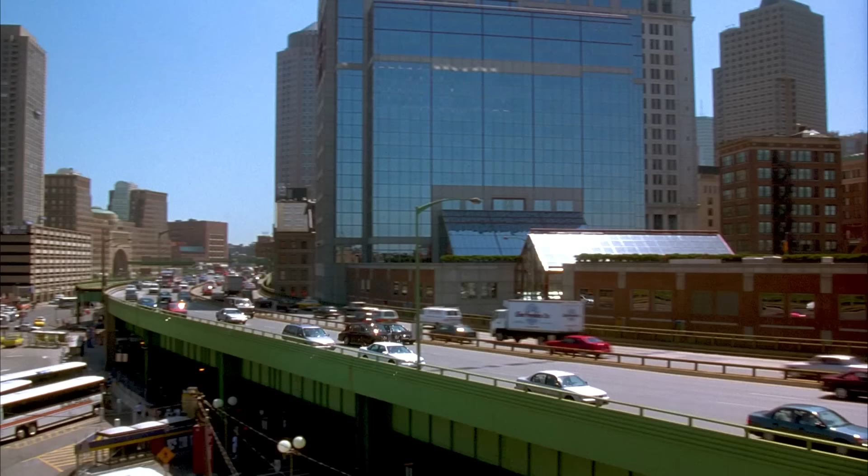Boston, Massachusetts is one of the oldest cities in America, founded in 1630, more than a few years before the advent of modern motor vehicles. In the 1980s, traffic in downtown Boston was nearly unbearable from the tangled streets laid out centuries ago. So, city planners and state transportation officials came up with what they considered a grand plan.

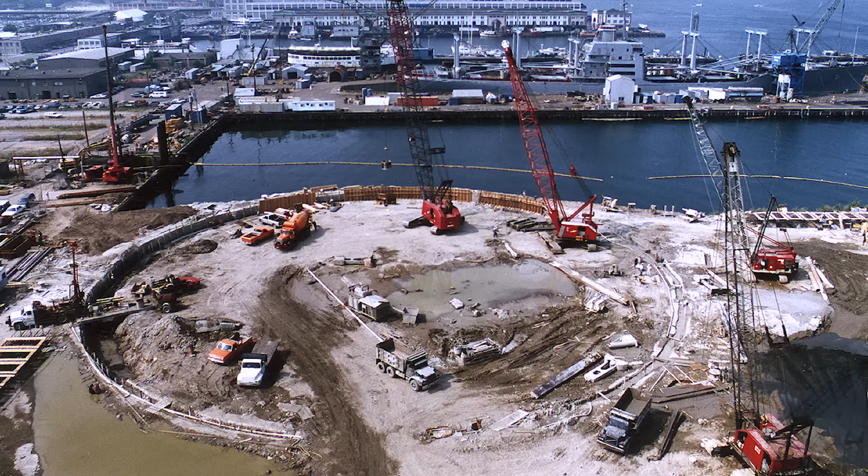They would reroute the elevated highway and so-called central artery of Interstate 93 into a tunnel below downtown, and extend Interstate 90 across the Inner Harbor to the airport in another tunnel. Construction started in 1991, and the project was given the nickname Big Dig because of the sheer volume of excavation required for the two tunnels. In terms of cost and complexity, the Big Dig was on the scale of the Panama Canal or Hoover Dam.

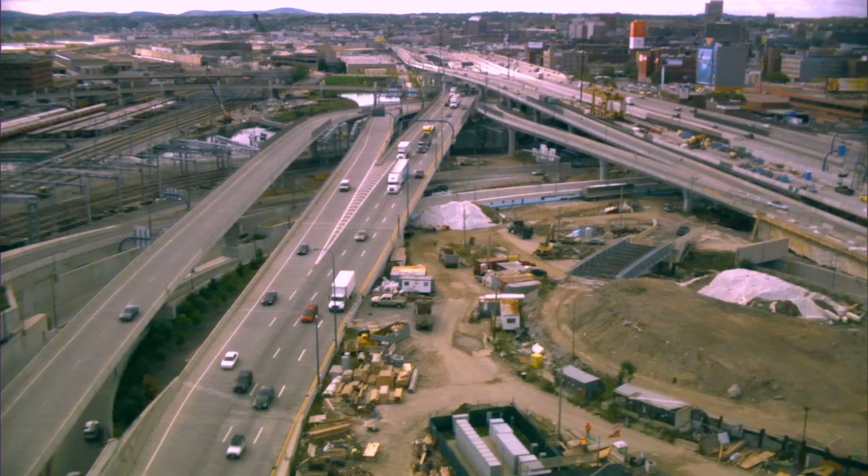It featured some of the most innovative construction methods of the time, and after 16 years of work, the project was finished on time and under budget. Actually, no. You might know the story already. Of course, the Big Dig did make a big dent in the traffic problem in Boston, but that came at a staggering price. The project was plagued with problems, design flaws, fraud, delays, and of course, cost overruns.

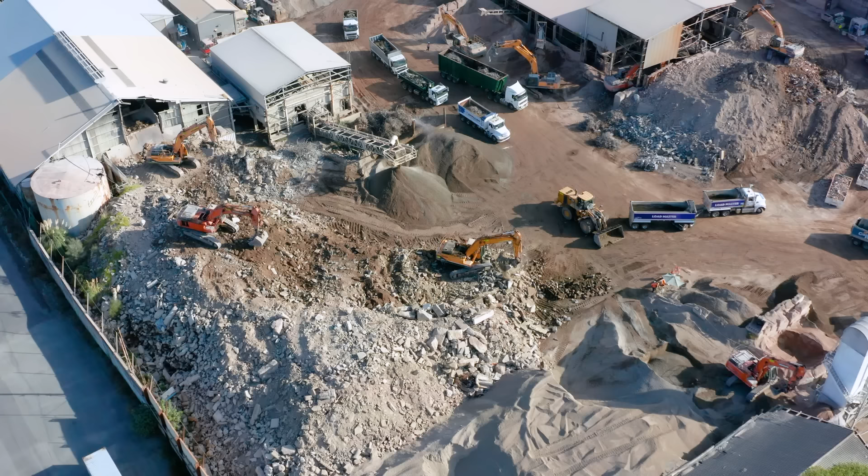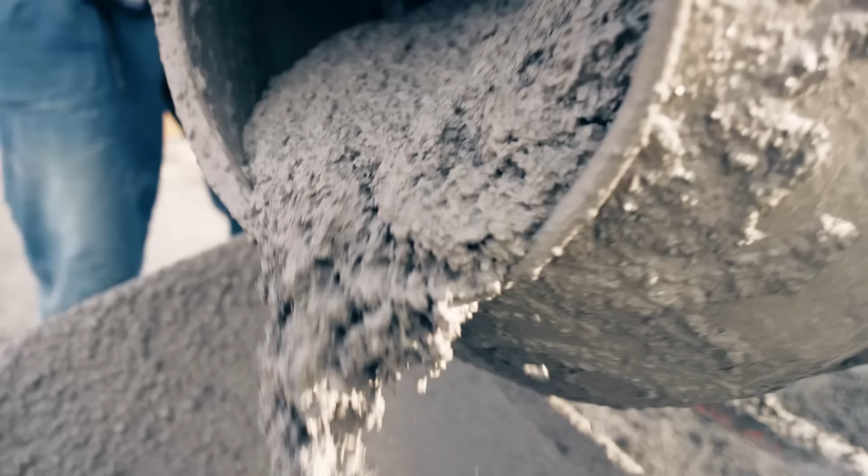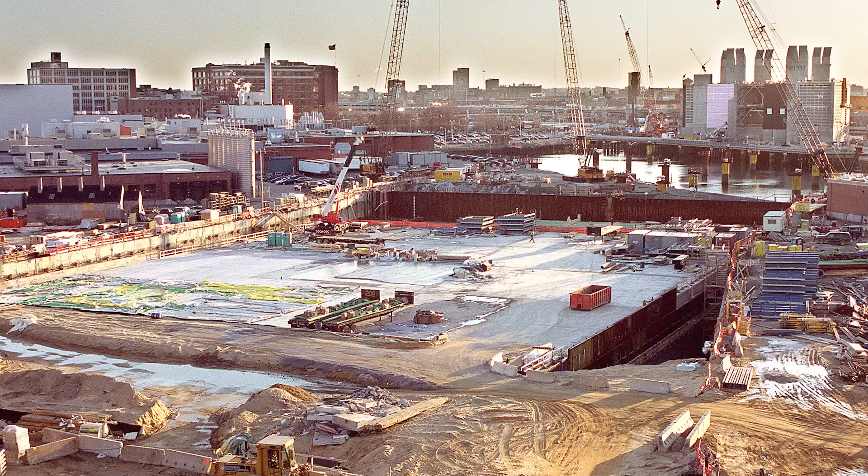Not many jobs go quite as awry as the Big Dig, but it's not just mega projects that suffer from our inability to accurately anticipate the expense and complexity of construction. From tiny home renovations to the largest infrastructure projects in the world, it seems like we almost always underestimate the costs. And the consequences of missing the mark can be enormous. Well, I've been one of those engineers trying to come up with cost estimates for major infrastructure projects, and I've been one of those engineers who underestimated. So I have a few ideas about why we so consistently get this wrong.

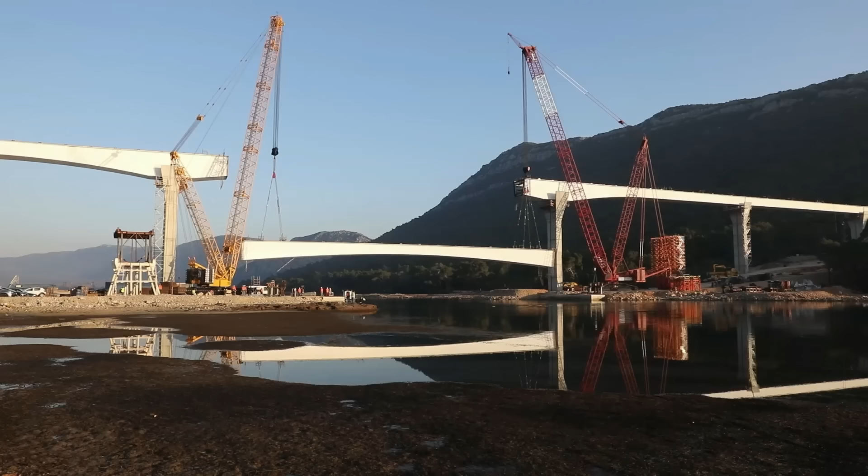In today's episode, we're trying to answer the question of why construction projects always seem to go over budget. Major projects are often paid for with public funds, so it's vital that the benefits we derive from them are worth the cost. And the only way we can judge if any project is worth starting is to have an accurate estimate of the costs first.

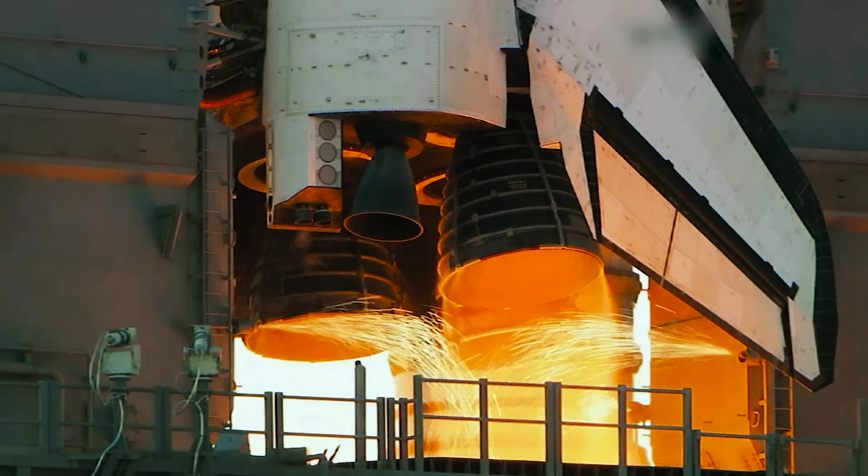And of course, this is not just a problem with civil infrastructure, but with all types of large projects paid for with public funds, like space programs and defense projects. They have to be justified. Most projects have benefits, and you do get those benefits at the end, no matter the cost. But if they aren't worth the cost, you'd rather not go through with the project at all. This is especially true for projects like streets and highways where not only the costs get underestimated, but the benefits are often overestimated too.

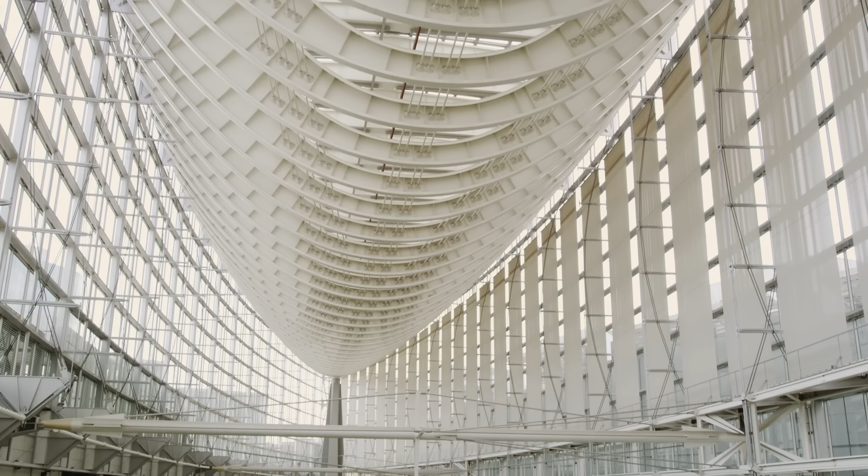One of the biggest issues we face with large projects is a chicken and egg problem. You don't know how much they'll cost until you go through the design, but you don't want to go through a lengthy and expensive design phase and end up with a project you can't afford. Budgeting and securing funds are usually slow processes, plus you need to know if the job's even worth doing in the first place. So you can't just wait until the bids come in to find out how much a project is going to cost. You need to know sooner than that, which usually means you need your design professional to estimate the costs. For an infrastructure project, that's the engineer, and engineers are notoriously not good at estimating costs.

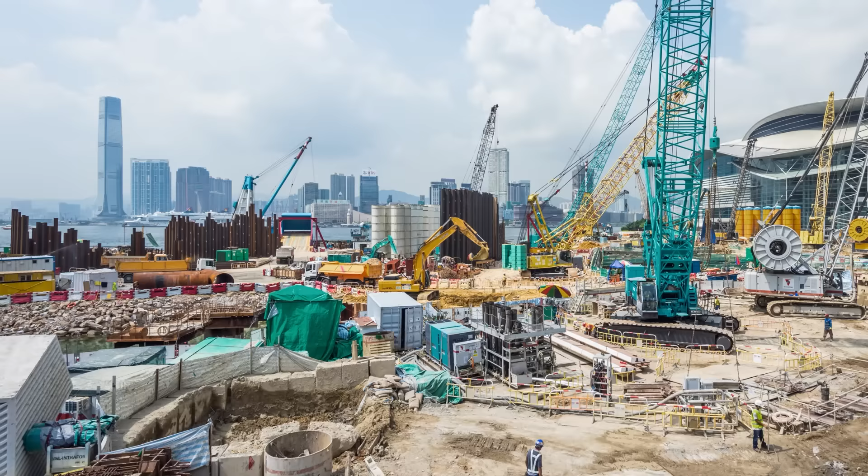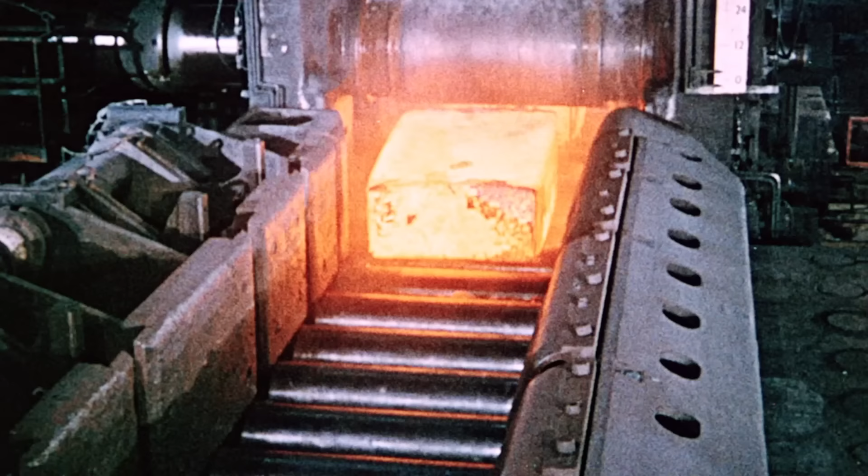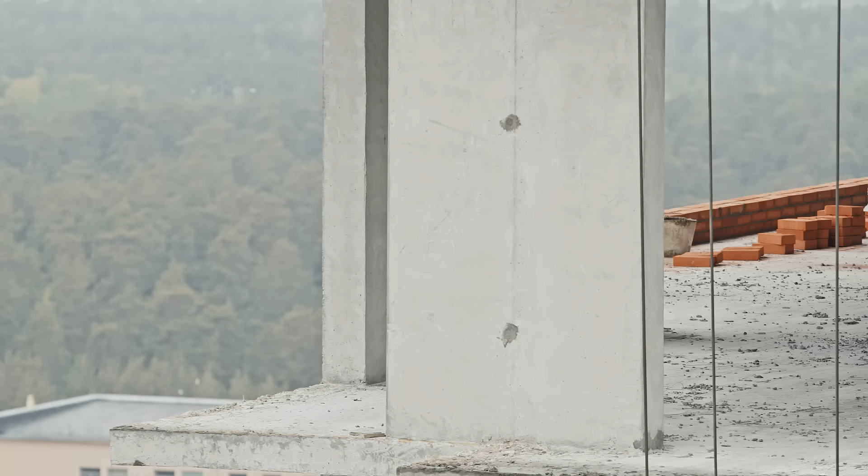We don't know which contractors are busy and which ones aren't, what machinery they have, or whether or not they'll bid on your project. We don't know the sales reps at the concrete and asphalt plants, or keep track of the prices of steel, aggregates, pumps, and piping. We don't have a professional network full of subcontractors, material suppliers, and equipment rental companies. We didn't study construction cost estimating in college, and most of us have never built anything in the field. And the people who have, those who are most qualified to do this job, the contractors that will actually bid on the project, usually aren't allowed to participate in the cost estimating during design because it would spoil the fair and transparent procurement process.

It would give one or more contractors a leg up on the competition. Because, here's a little secret, they aren't always so good at estimating costs either. When those bids come in, there's often a huge spread between them, meaning one of the most significant uncertainties of an entire project is sometimes simply which contractors will decide to bid the job.

Of course, there are some alternatives to the normal bidding process that many infrastructure projects use, but even those often require early cost estimates from people who are necessarily limited in their ability to develop cost estimates. In fact, the industry term for the cost estimate that comes from an engineer is the opinion of probable construction cost, or OPCC. Take a look at that mouthful. Two qualifiers, opinion of probable construction cost.

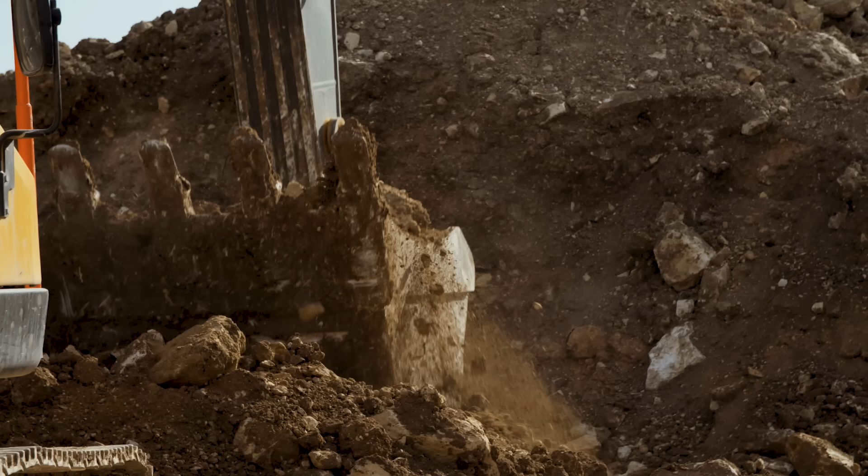And still, agencies and municipalities and DOTs will write that number down on a folded piece of paper, slide it surreptitiously to their governing board and whisper, "This is how much we need." And the next day, the journalists who were at the meeting will publish that number in the news. And now every future prediction of the project's cost will be compared to that OPCC, no matter how early in the process it was developed.

All this to say, estimating the cost of a construction project is hard work, especially early on in the project's life cycle. It takes highly skilled and knowledgeable people to do it well, and even then, it's a process absolutely chock full of uncertainties and risks that are really hard to distill down to a single dollar value. But construction cost estimates are just imprecise. If that were true, you would expect us to overestimate as frequently as we come under. We know that's not the case. Why is it always an underestimate?

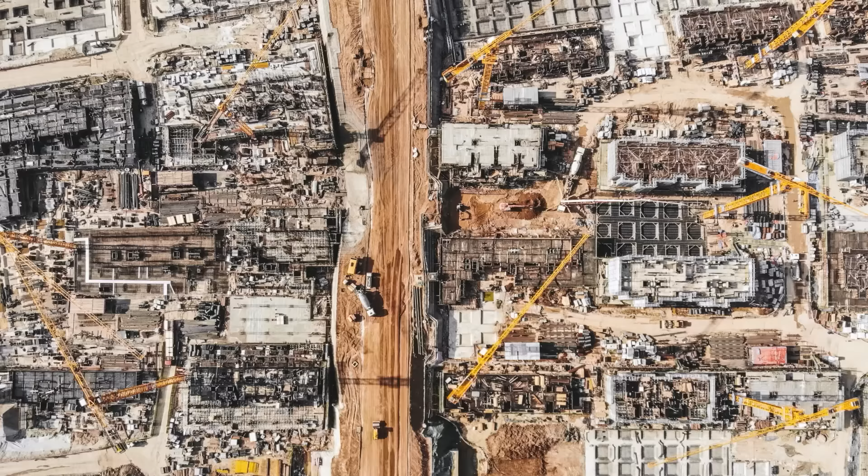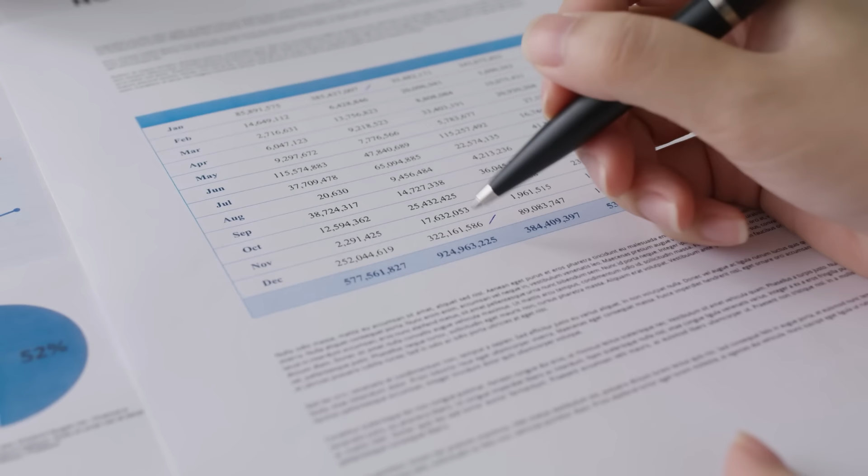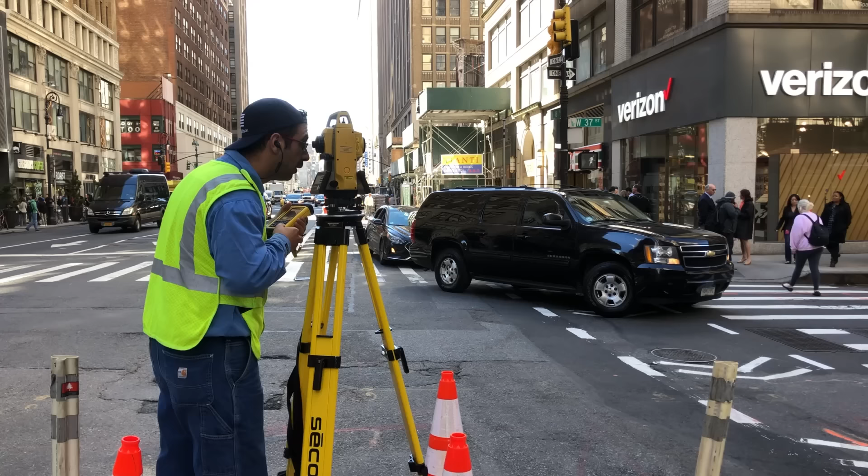One hint is the fact that you often just hear a single number for the project's cost. What's included in that $15 billion for the Big Dig or the cost estimate you see for a major project in the news? The truth is that it's different for every job, to the point where it's almost a meaningless number without further context. Large infrastructure projects are essentially huge collaborations between public and private organizations that span years and sometimes decades between planning, design, permitting, and construction. Land acquisition, surveying, environmental permitting, legal services, engineering and design, and the administration to oversee that whole process all cost money, sometimes a lot of money. And that's before construction even starts.

So if you think that a bid from a contractor is the project's cost, you're missing out on a lot. And if those pre-construction costs get included in one estimate, for example, the final tally of a project's cost, when they weren't included in an earlier estimate, like the engineer's OPCC, of course it's going to look like the project came in over budget. You're not comparing apples to apples.

Another reason for underestimation is inflation. The main method we use to estimate how much something will cost is to look back at similar examples. We consult the ghost of construction past to try and predict the future. It's not unusual to look at the cost of projects 5 or 10 years old to try and guess the cost of a project 5 or 10 years into the future. The problem with that is dollars or euros or yen or pound sterling don't buy the same amount of stuff in the future that they did in the past. The cost of anything is a moving target, and it's usually moving up.

That's okay, you might think, just adjust the costs. There are even inflation calculators online, but they normally use the Consumer Price Index. That's a figure that tracks the cost of a basket of goods and services that a typical individual might buy. Prices vary widely across locations and types of goods, so the idea is that if you monitor the dollar price of groceries, electricity, clothing, gasoline, etc., it can give you a broad measure of how the value of money changes over time for a normal consumer. But there's not that much concrete and earthwork in that basket of goods, which means the Consumer Price Index is generally not a good measure of how construction costs change over time.

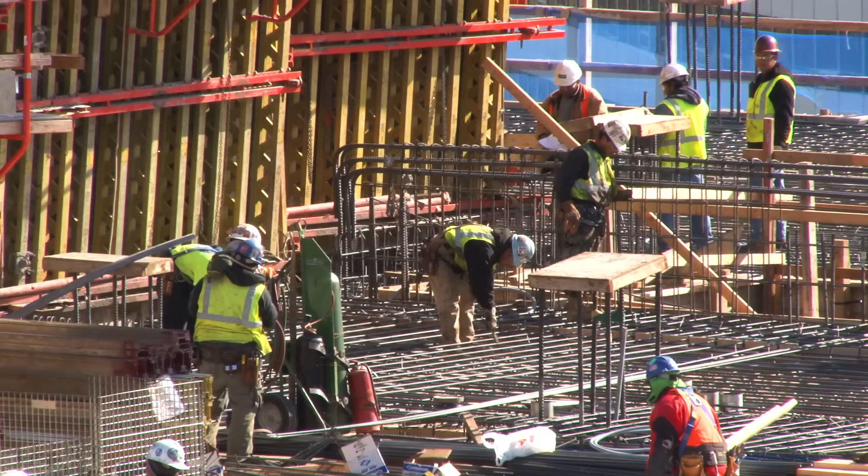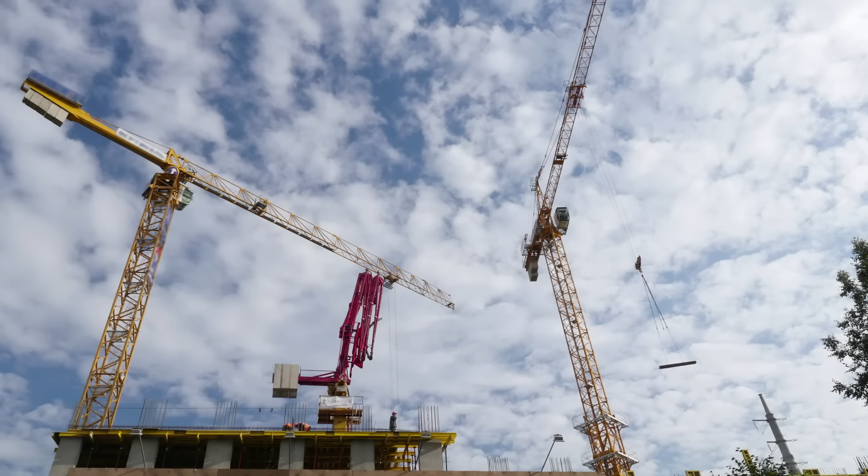There are a few price indices that track baskets full of labor hours, structural steel, lumber, and cement, and even separate those baskets by major city. You have to pay to get access to the data, and they can help an engineer adjust past construction costs to the present day. But they can't help them predict how prices will change in the future. And that's important because large infrastructure projects take a long time to design, permit, and fund. So if there are 2 or 5 or 10 years between when an estimate was prepared and when it's being used or even discussed, there's a good chance that it's an underestimate, simply because the value of money itself slid out from underneath it.

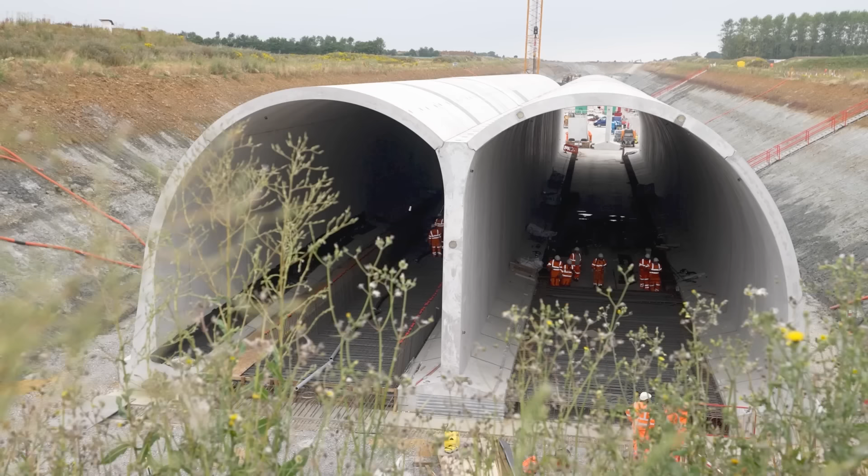Cost estimates have an expiration date, a concept that gets overlooked, sometimes even by owners, and often by the media who report these numbers. That slow timescale for construction projects creates another way that costs go up.

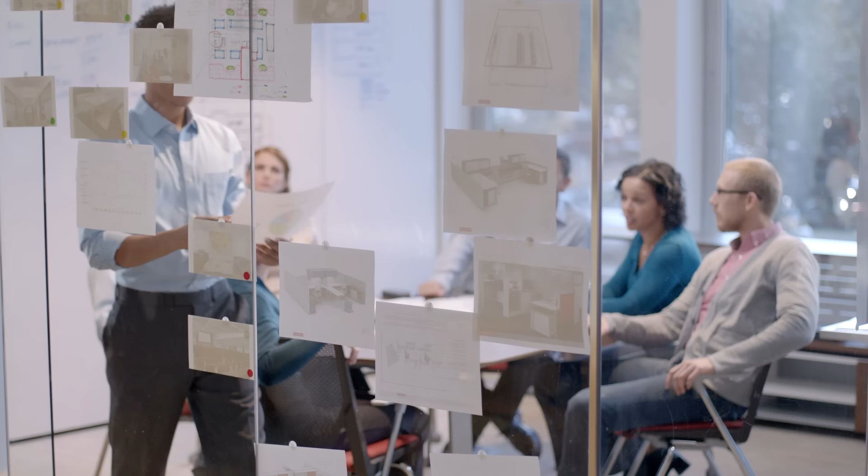Designing a big project is like navigating a big ship. If things start moving in the wrong direction, the time to fix it is already past. So we don't do it all in one fell swoop. You have a bunch of milestones where you stop and check the progress because going back to the drawing board is time-consuming and expensive. The issue with this process is that the further a project matures, the more people get involved. Once you've established feasibility, the bosses and bosses' bosses start to weigh in with their advice.

Once you have a preliminary design, it gets sent out to regulators and permitting agencies. Once you have some nice renderings, you hold public meetings and get citizens involved. And with all those cooks in the kitchen participating in the design process, does the project get simpler and more straightforward? Almost never. There is no perfect project that makes everyone happy, so you end up making compromises and adding features to appease all the new stakeholders.

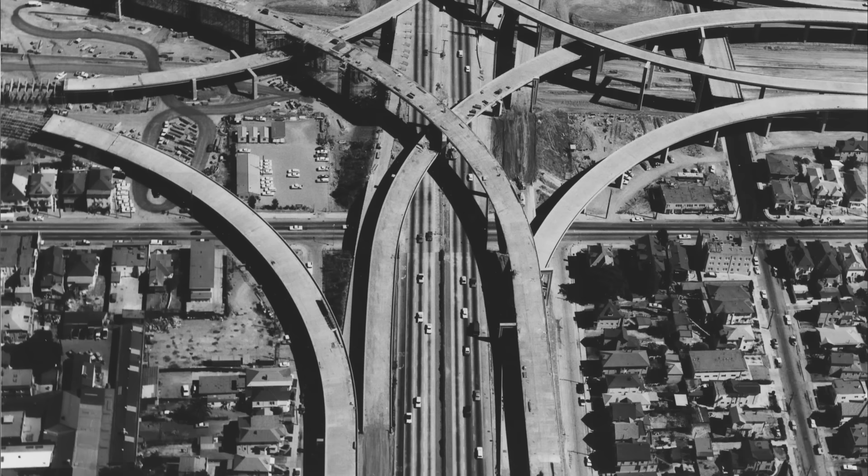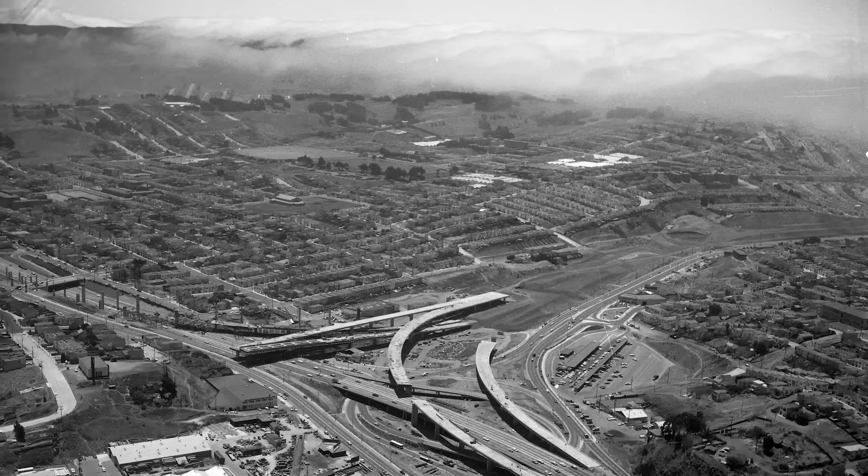This may seem like a bunch of added red tape, but it really is a good thing in a lot of ways. There was a time when major infrastructure projects didn't consider all the stakeholders or environmental impacts. And sure, the projects got done more quickly, efficiently, and at a lower cost on the surface, but the reality is that those costs just got externalized to populations of people who had little say in the process and to the environment. I'm not saying we're perfect now, but we're definitely more thoughtful about the impacts projects have, and we pay the cost for those impacts more directly than we used to.

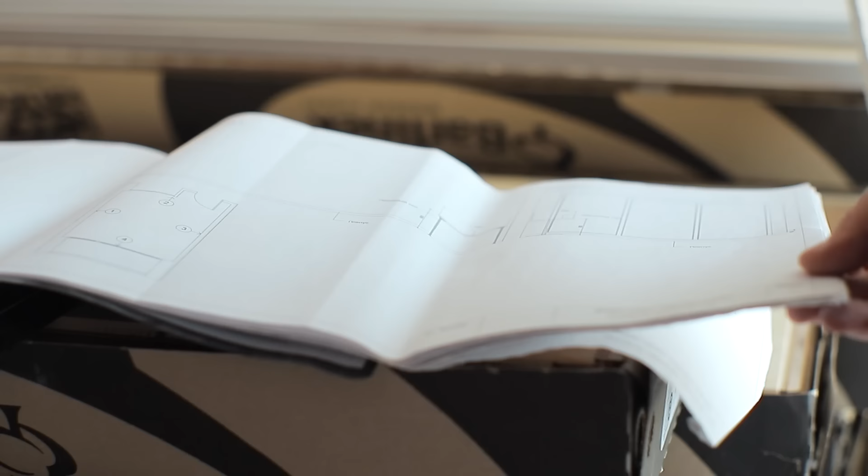But often those costs weren't anticipated during the planning phase. They show up later in design when more people get involved, and that drives the total project cost upward. And the thing about project maturity is that even when you get to the end of design, the project still only exists as a set of drawings on a piece of paper. There are still so many unanswered questions, the biggest one being, how do we build this?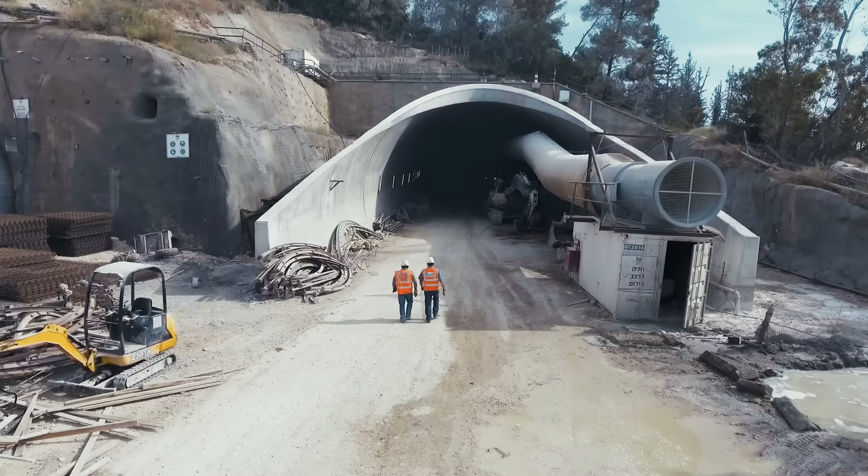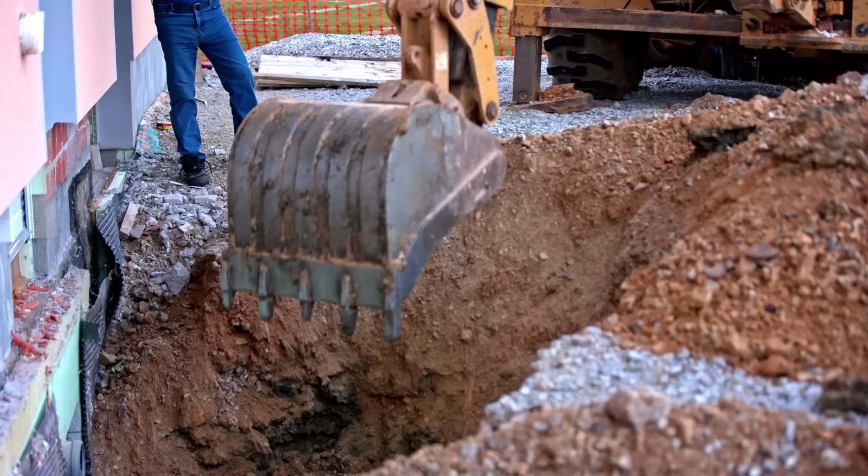Large projects are complex, putting them at the mercy of all kinds of problems that can crop up during construction. Material shortages, shipping delays, workforce issues, bad weather, and more. Then there are the unexpected site conditions. An engineer can only reasonably foresee so much while coming up with a design on paper or in computer software. A good example is the soil or rock conditions at the site.

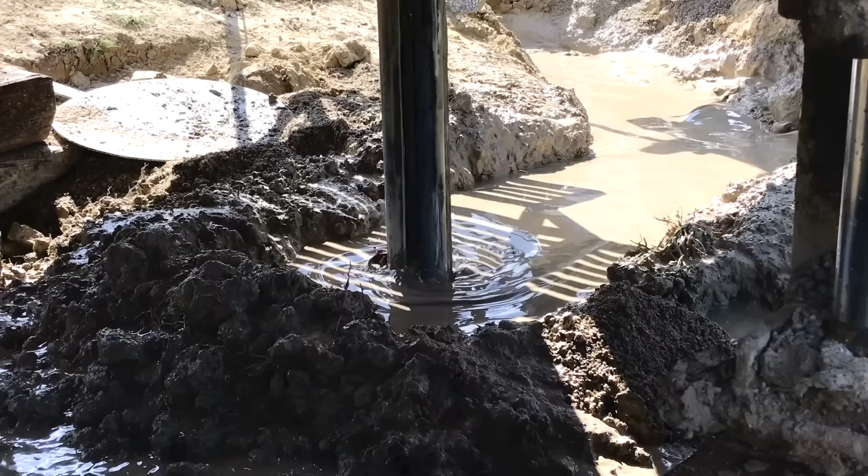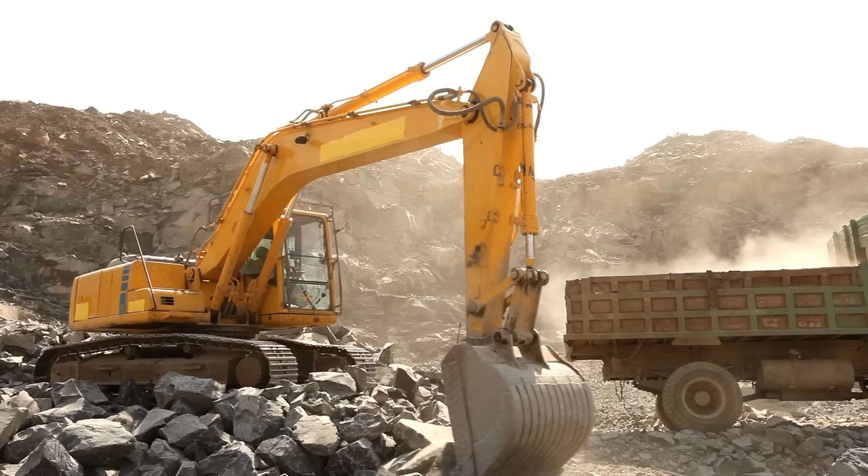During design, we drill boreholes, take samples, and do tests on those samples. That lets you characterize the soil or rock in one tiny spot. Of course, you can drill a lot of holes, but those holes and those tests are expensive. So it's a guessing game, trying to balance the costs of site investigations with the consequences of mischaracterizing the underlying material.

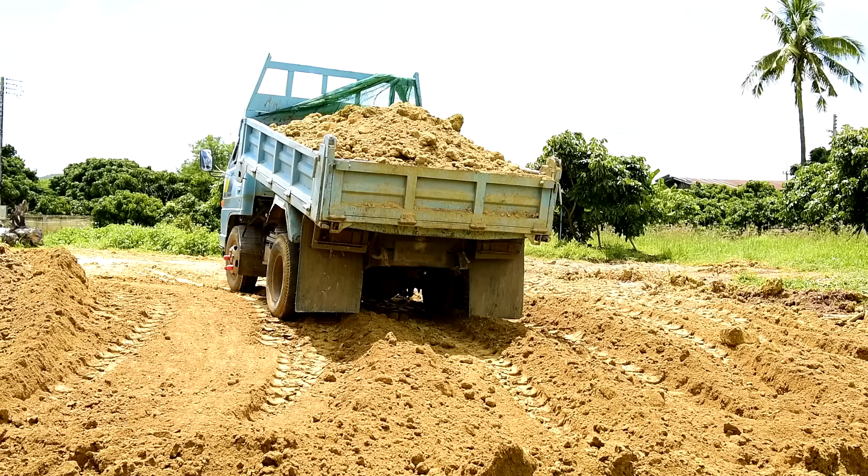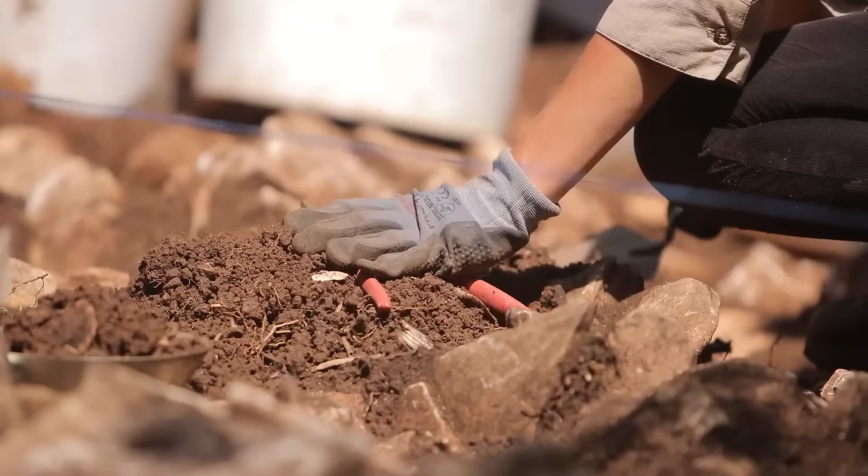If the engineer guesses wrong, it can mean that excavation is more time-consuming because the contractor expected soil and got rock, or that backfill material has to be brought in from somewhere else because the stuff on site isn't any good. In the worst cases, projects have to be redesigned when the conditions at the site turn out to be different from what was assumed in the design phase. And that's just the dirt. While it might be great for science or history, imagine the cost of your project if you find historical artifacts or endangered species that you didn't know were there.

It's a simple reality that there's a lot of uncertainty moving from design into construction, and there just aren't that many unexpected conditions that make a construction project simpler and cheaper. Of course, opportunities for cost savings do crop up from time to time, but usually those savings get pocketed by the contractor, not passed along to the owner. That's intentional, that the contractor takes on a lot of the risk, both good and bad. But you can't saddle a contractor with all the risk that something unexpected will show up. And nearly all large contracts have change orders during construction that drive up the cost of the project.

Of course, you can't ignore the more nefarious ways that costs go up. Any industry that has a lot of money moving around has to contend with fraud, and you don't have to look too hard through the news to find examples of greed. And there are also plenty of examples where politicians or officials misrepresented the expected cost of a project to avoid public scrutiny. But in most cases, the reasons for going over budget are much less villainous and far more human. We're just too darn optimistic and short-sighted. But that's not a good excuse, and I think there's a lot of room for improvement here. So what do?

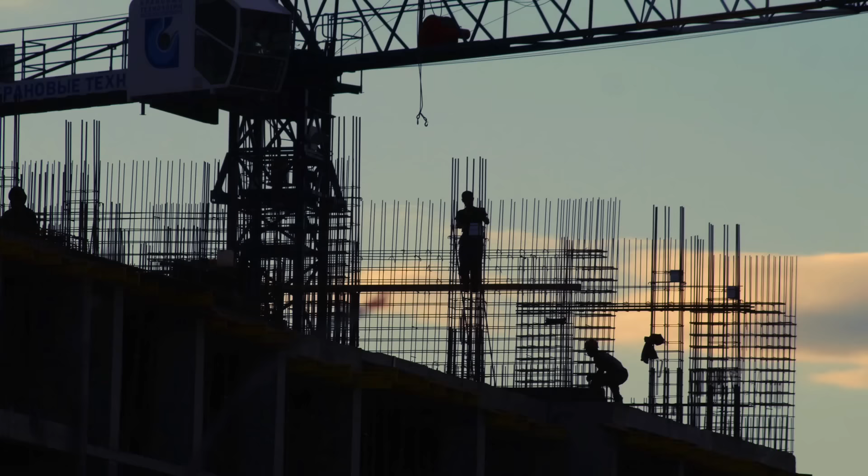How can we get the actual project costs closer to the budget? Of course, we can bring construction costs down, but that's a whole discussion in and of itself. Maybe we'll table that topic for a future video. I can hear people screaming at the monitor to just add contingency to the budget. Anyone who's ever guesstimated the cost of anything knows to tack on an extra 15% for caution. Of course, contingency is a tool in the toolbox, but even that has to be justified.

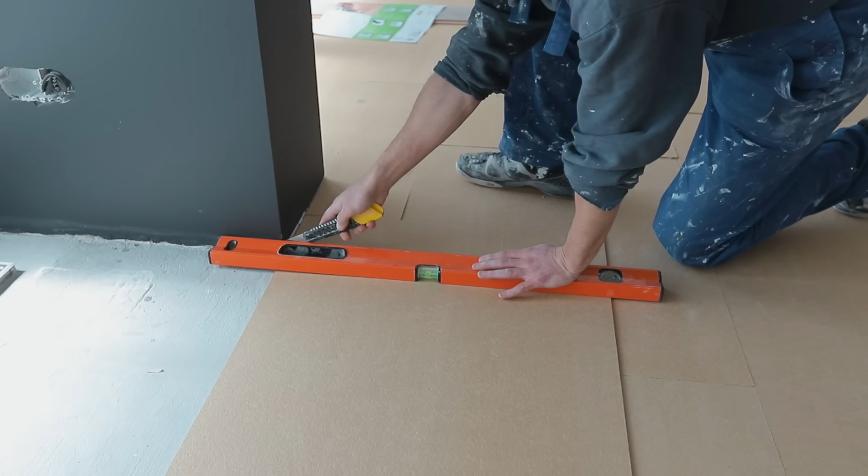We know that the final cost of a project can be more than twice the preliminary estimates, but if you tell a client you added 100% to your estimate for safety, most likely you're going to get fired. No one wants to believe there's that much uncertainty, and also, it might not be true. You can't set aside $1 billion for a project that costs $100,000, give or take a few K. Sure, you'll come in under budget, but you just tied up a huge pile of public resources for no good reason. It turns out a lot of the research suggests spending more money during the planning and design phases.

Of course, the paper-pushing engineer is saying to spend more money on engineering, but really, construction is where the majority of project costs are. So the theory is that if you can reduce the risks and uncertainty going into construction by spending a little more time in pre-construction, you'll often earn more than the cost back in the long run. Take 3 to 5% of those dollars you would have spent on construction and spend them on risk assessment and contingency planning and see if it doesn't pay off. Honestly, even most contractors would prefer this. I know their insurance carriers would.

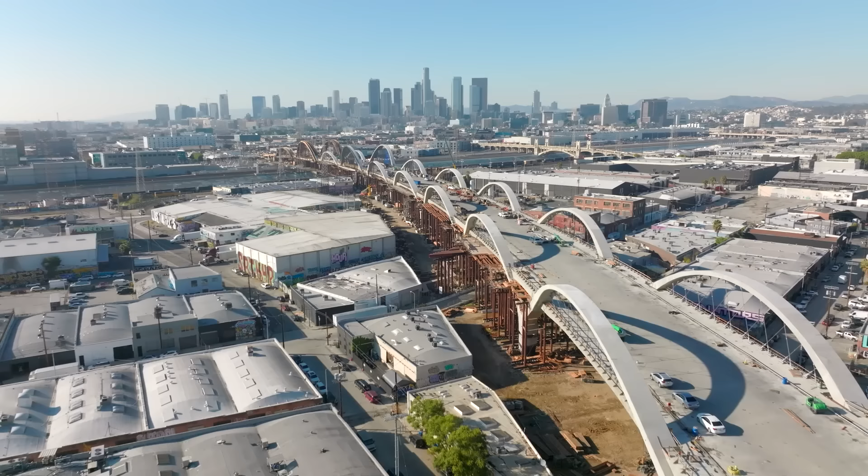But all that considered, I think the biggest place for improvement in budgeting for large construction projects is simply how we communicate those budgets. A single dollar number is easy to understand and easy to compare to some future single dollar number, but really it's meaningless without more context about when it was developed and what it includes. Because what is a budget anyway? It's a way to manage expectations. And if you're early on in the planning or design phase of a big project, you should expect the unexpected. There's uncertainty in big projects, and it should be okay to admit that to the public.

It should be okay to say we think it's going to cost X, but there's still a lot of unknowns, and we think the project will still be worth doing even if the cost climbs to Y. And if it goes beyond that, we're not just going to keep pressing on, we're going to regroup and find a way to make the benefits worth the cost. There is a ton of room to improve how we develop cost estimates for projects, but there's tons of room to improve how we communicate about them too.